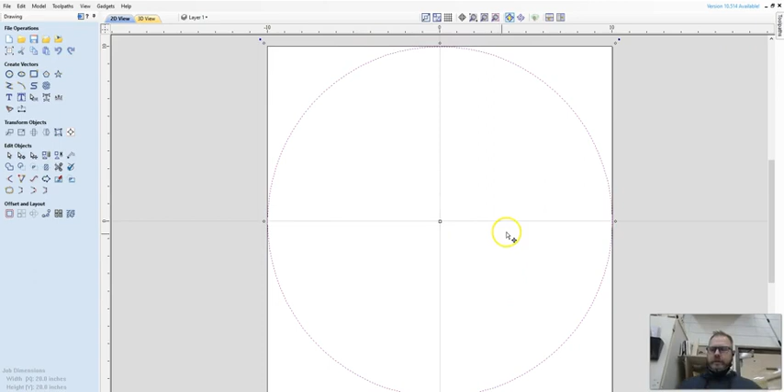So then you got to decide what you want this to look like. And I've pulled up a few other options. So this is the clock that sits above the doors as you exit and come into the school, into the wood shop. You can see we decided to go with the more traditional, kind of a big block letter 1 through 12 on the clock face. But we can also go simpler.

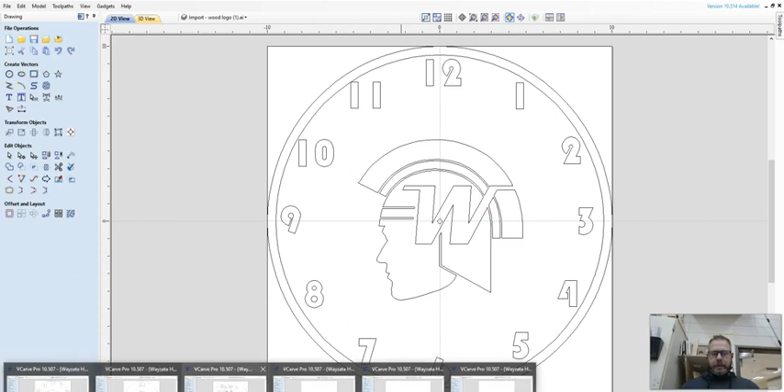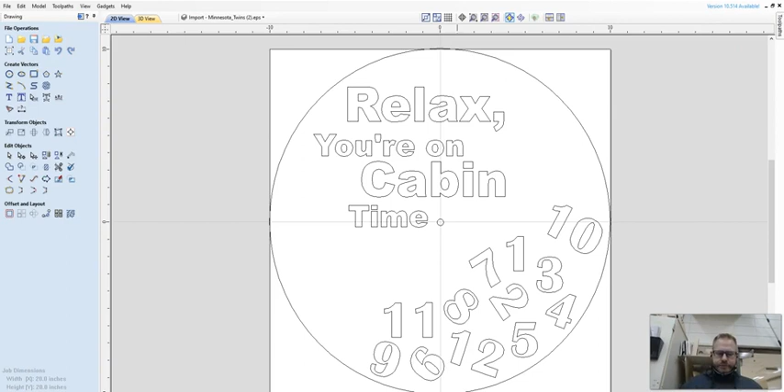If you want to come up with a logo, the best place to come up with a logo is this place called brandsoftheworld.com. So Brands of the World, it got a little bit more difficult here because the school has decided to block the thumbnail images. So if you want to go to brandsoftheworld.com, go ahead and do that, but use your phone to do it so you can see what these logos actually are. I know there's one from the Minnesota Twins that I really like, and I know that it's the first one here. So in the past, we'd be able to see a thumbnail of what logo was there. But now we're going to have to kind of risk it.

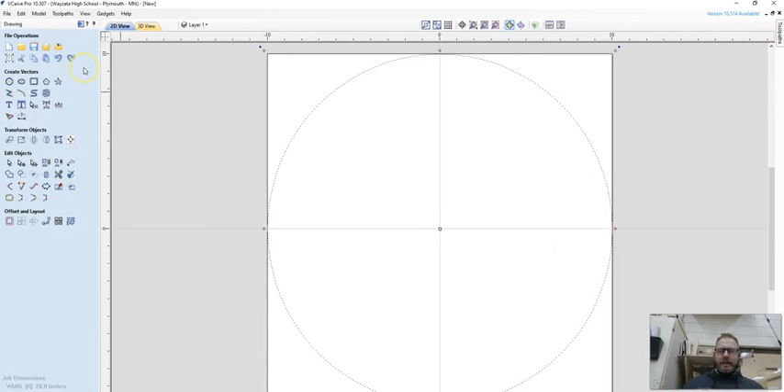So I'm going to click here. I want to make sure that my vector format is in EPS or AI. Hit I agree and then download. And this now downloaded it to my computer. So I'm starting blank. Oops, that's not the right one. That's not the right one either. I got too many windows open here. So I want to get that Twins logo in here. Now I'm going to come up here and say import vectors. I'm going to go to downloads and find Minnesota Twins. And there it is. It's going to pop it in to my drawing.

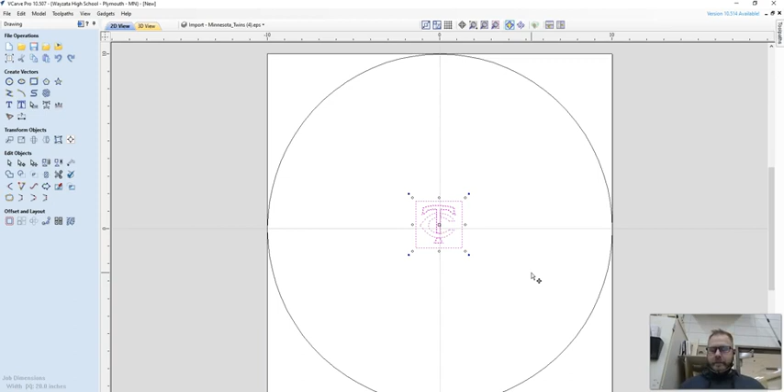Now, it is not the size that I want it to be, nor is it in the location that I want it to be. I'm going to use the scroll wheel on my mouse. And if you've got a really detailed drawing, you're going to have trouble getting it to cut out on the CNC router. Because think about that bit on the CNC router has a diameter, and we're going to use the 1/4 inch diameter bit for this. So if you've got lines that are any closer than 1/4 inch together, the router is not going to cut them out.

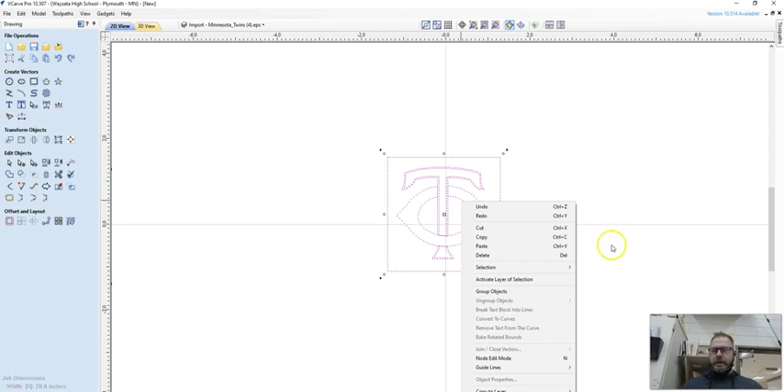I'm going to do a little editing here. So if I click on a line and it turns pink, I can edit that line. If you click on a line and all of it turns pink, you right click on it and say ungroup object. Now my object's already been ungrouped, so I don't have to do it. But ungroup object back to original layer if you can't edit line by line. And I'm going to simplify this logo a little bit. I want to get rid of that square, and I also want to get rid of that extra outline in the T, because we don't want to cut that. So my router bit is going to cut inside of that line.

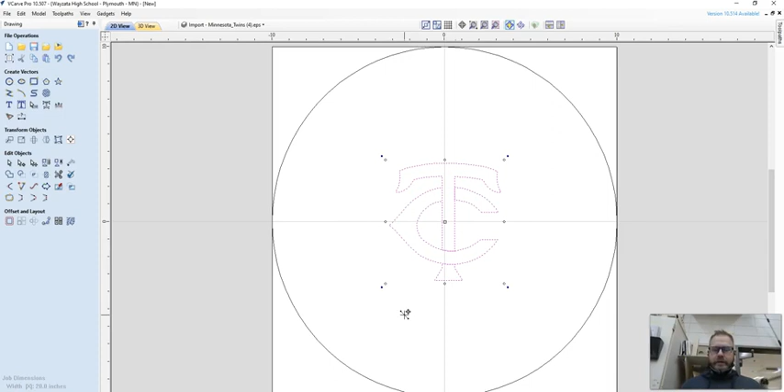So I'm going to scroll back out with the scroll wheel on my mouse, and I want to make that TC a lot bigger. And you can obviously modify this throughout the whole process. So if you want to have this change in size, you can feel free to have it change in size.